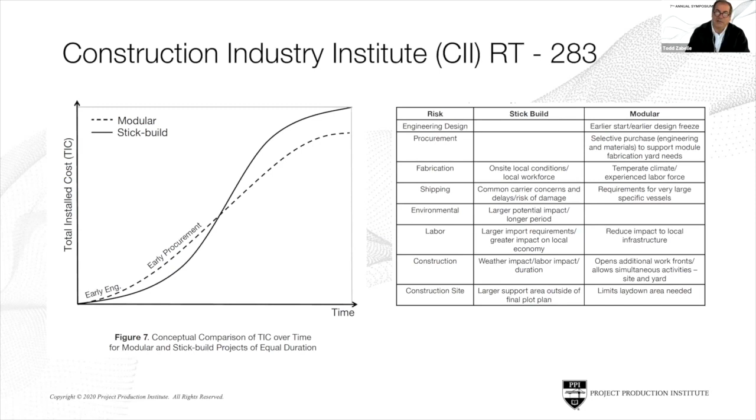But again, at the chance of being provocative, we'd be interested in seeing what data CII actually has that shows doing things as what they call modular is going to take less time and cost less. And basically, if you understand the fundamentals of project production management and operations science, you can see why that may not actually be the case.

So because of all this activity, contractors see an opportunity, and many are hiring what we would call manufacturing production engineers. We have some on the line with us today, and their job is to figure out how do we industrialize what is currently going on. It's interesting to watch the manufacturing production engineers observe the project managers and engineers and vice versa, trying to figure out how to make all this work.

But as Gary asked earlier, not only what is a factory model, but does adopting a factory model and moving work off site solve the problem? And the problem, obviously, we're saying is better performance in the form of less use of cash, lower costs, and less time. We're hearing from even some of the people on the line today, we see the schedule compression. We're not necessarily seeing the cost. Again, hopefully at the end of this presentation, some of that will be vetted as to why that might not be the case.

When we push back on what is a factory model, interestingly enough, a factory model to a lot of people that are involved in engineering and construction is just really standardization of products or the assets. And we're very fortunate to have a good friend of mine, Mark Reynolds, on, who is going to talk later. He's the CEO of Mace. I'd say it's probably one of the best construction management firms in the world.

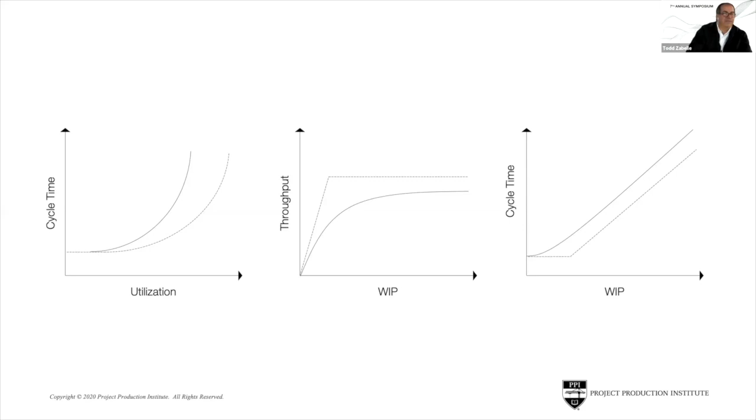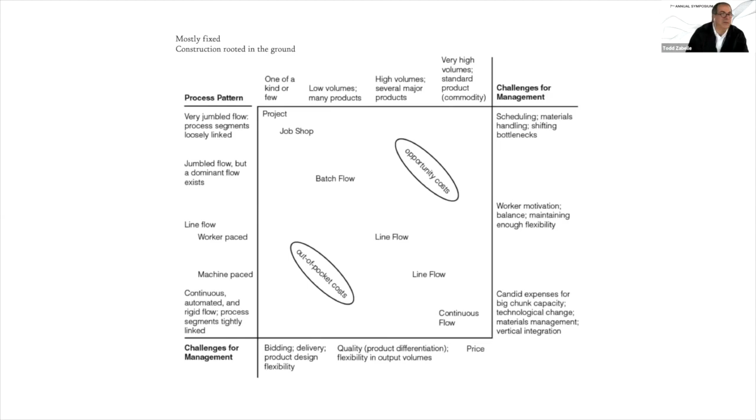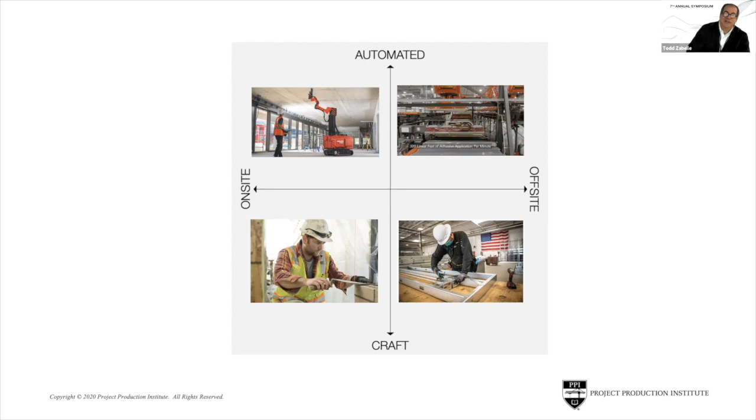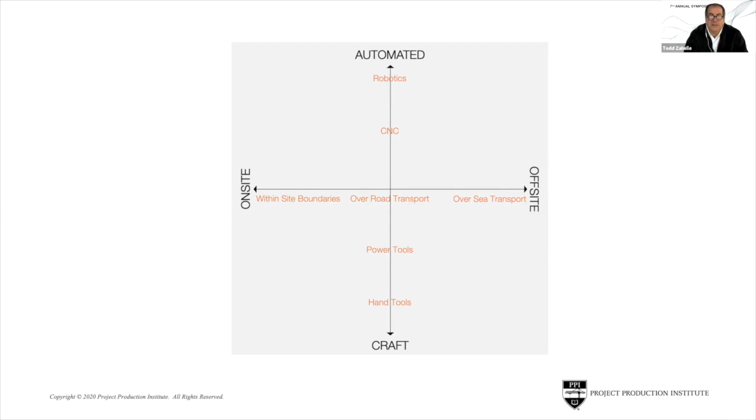And so because we're production guys and we think a lot about variability, obviously the further we go off-site, the more risk we have of variability coming into the production system. The same could be true for the craft versus automated perspective, and that is we start off with hand tools, we move to power tools, then maybe we go to computer numerically controlled machine tools, and then finally robotics, right? And so again, this is just trying to put a little bit more color on what this might look like.

So what we're saying is, which direction are you moving? And in hindsight, we probably should have put a poll on this and polled the audience. But where are we moving? Are we moving work off-site? We just want to get it out of here for some reason, and we'll still do it craft-based. Which, hey, if you've been in a lot of fabrication facilities, and I've been in a lot, really all that's happening there is just moving the same work off-site. Okay, are we keeping it on-site but automating it, or are we moving it off-site and automating it?

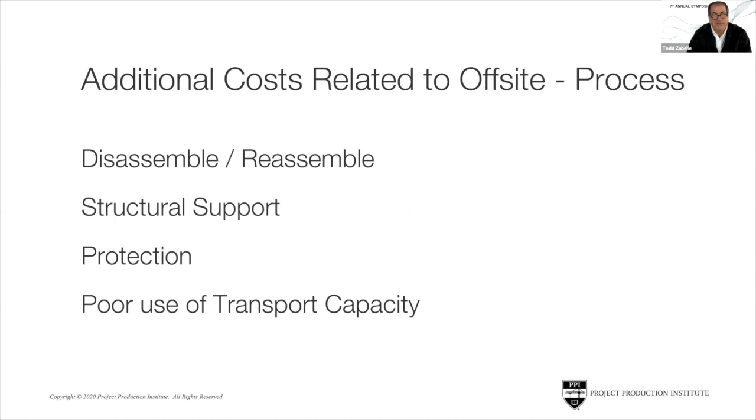And we can go all the way back to Ford, who said, look, I'm not going to ship the cars assembled, I'm going to ship the cars disassembled. All right. And what IKEA does with their flat packs, right? So again, I think what we're trying to communicate here is a word of caution to taking everything off site and attempting to fully automate things where that's not always the best practice.

I'm going to go through a really quick presentation here in 2 minutes, and then I'm going to wrap it up, okay? So if we go back 20 years ago, and Mark, you'll appreciate this, to Heathrow Terminal 5, this was a project where actually the company was taken over by a guy that ran Jaguar in the UK, so it had a high volume perspective to how they want to deliver the project.

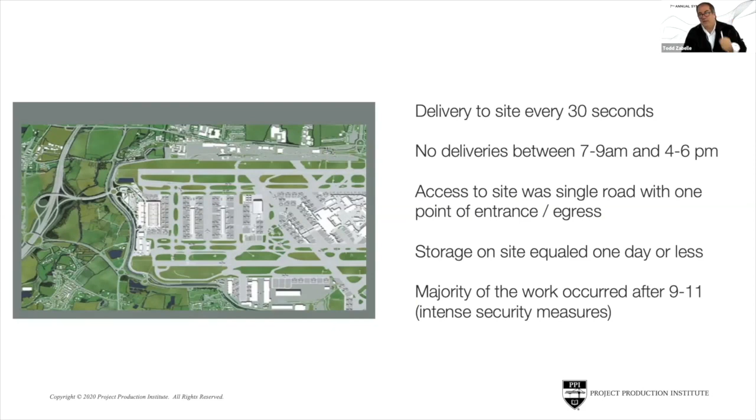But some interesting specs, if you will: delivery to site every 30 seconds, couldn't make any deliveries between 7 to 9 and 4 to 6, single road, storage was 1 day or less, the majority of work occurred after 9/11, so there was all sorts of crazy stuff going on.

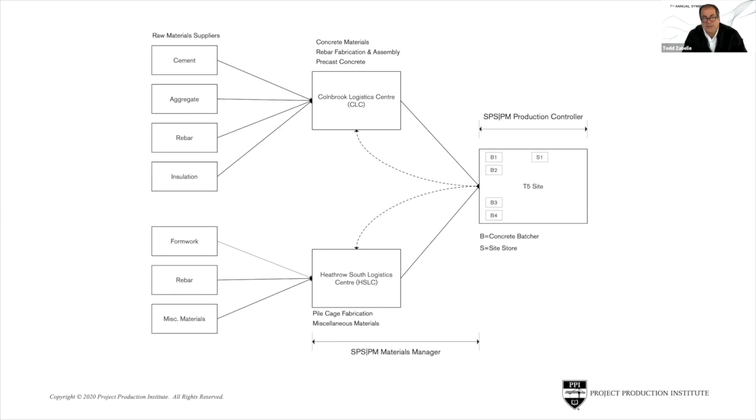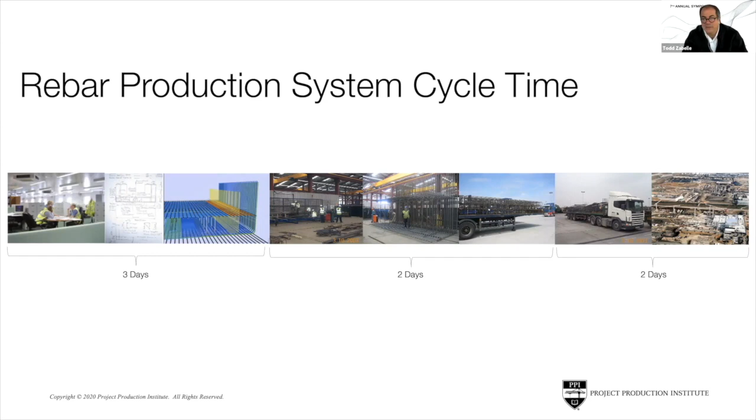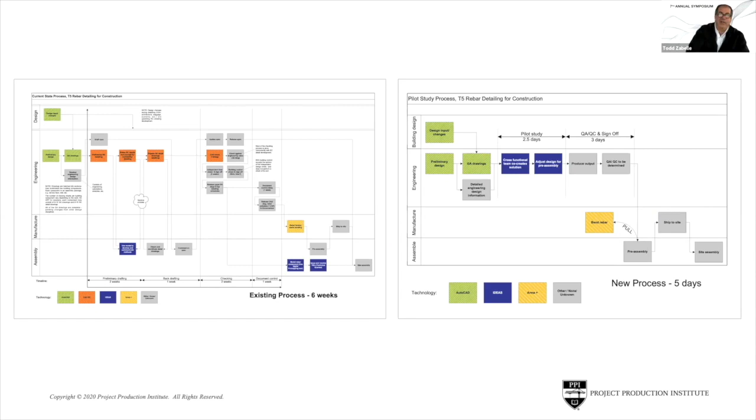But the design of the production system used 2 logistics centers to buffer upstream variability, to house material, and what we were able to do through using modern production, this is 20 years ago, was do the detailed engineering for the rebar in 3 days, the fabrication and assembly of cages in 2 days, and the delivery and installation in 2 days, with a total cycle time of 7 days, right? And that ability to go from 6 weeks down to 5 days, which was brought back up to 7 days, was all done in about a 2-hour planning period, looking at the production system.

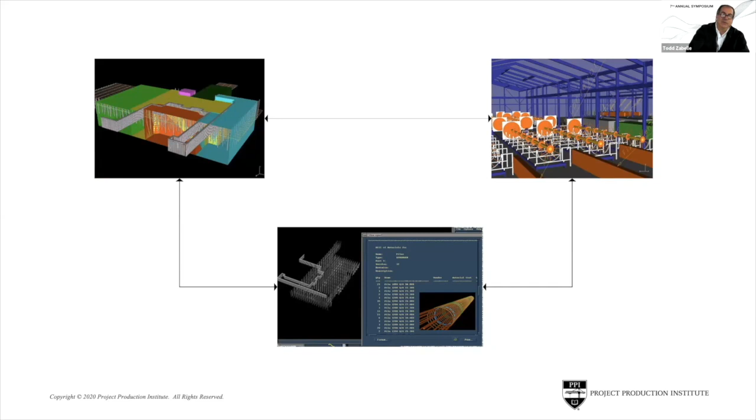And really quick here, finally, we also used what Mutu alluded to, this concurrent digital engineering, to design the foundation, the piles, and the factory that was going to produce the piles all simultaneously, and found that there were some issues with the machines and their ability to actually do the job, which was rectified in advance, well before anything was bought or purchased.

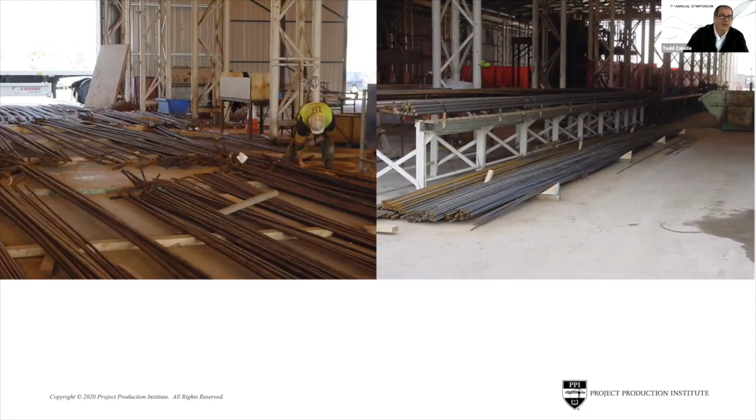And to be able to get to that level of detailed engineering so fast, standards were set up as a platform, if you will, on the modularization as a design requirement for the structural steel, and then the fixers were brought in early using immersive reality to figure out, can we or can we not do that work?

And so finally, again, here is offsite fabrication coming into a precast facility, and you can see there's old Greg looking for stuff, the rebar is all rusted out, and moving to a capacity-based model, right, with a minimal amount of inbound materials, provides way more flexibility, a lot safer environment there.

So, lots of interesting activity around automation offsite. This challenges current practice due to lack of understanding how and where we do the work. And we're proposing to you that PPM as foundation of operation sciences provides the needed framework. And with that, I will hand it back.